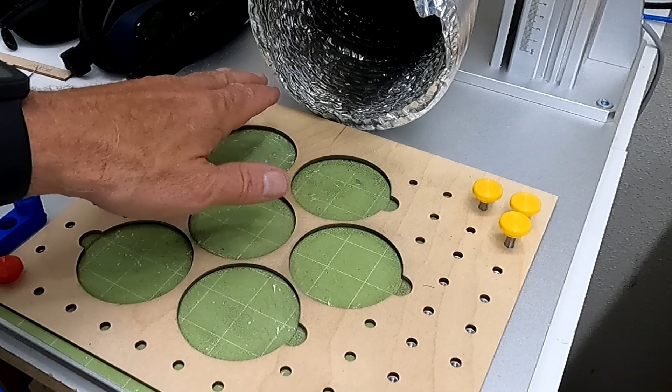This is a jig I made for these leatherette patches. In order to make this jig, I had to figure out the hole spacing of this breadboard, and it's real easy to do. So what I've done is I've screwed in some cap M6 screws here, both so I can get a measurement.

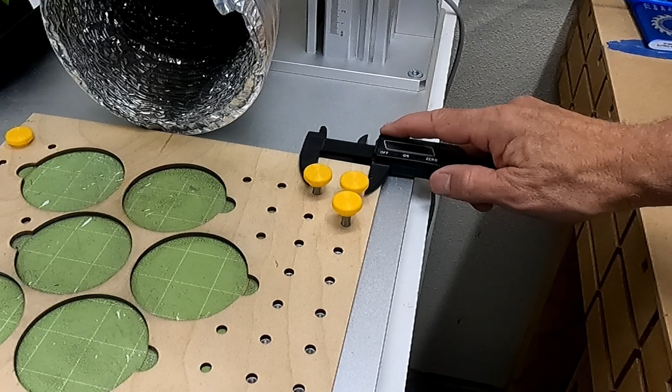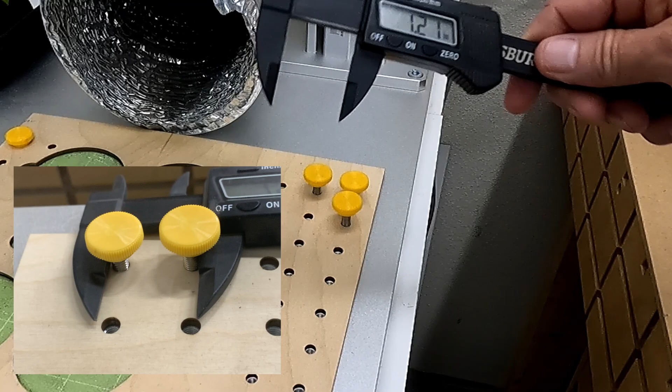I'm going to take my calipers and turn them on. I like to work in inches, so I'll zero it out. Then all I'm going to do is take the outside to outside measurement, and that is 1.21. I did that horizontally, and I want to take that same measurement vertically. They should be the same, which they are, 1.21. So we've got our spacing from outside to outside, measuring this outside to outside dimension.

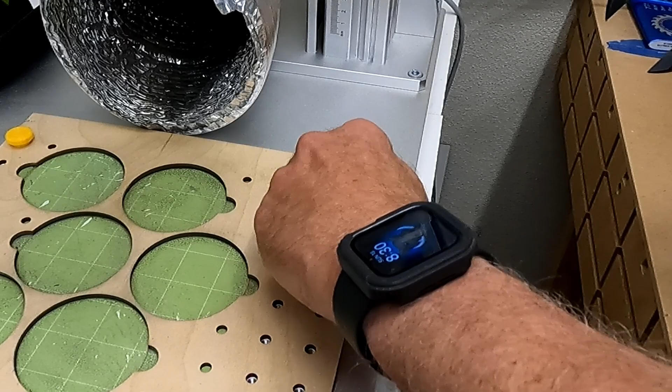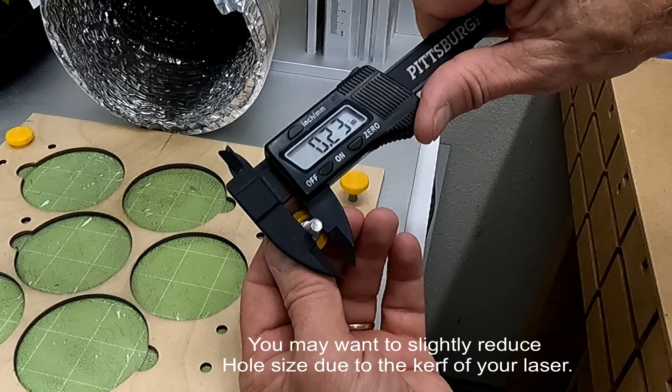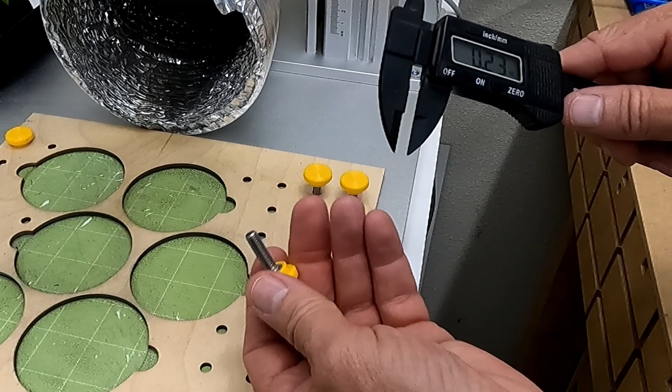Then I'll unscrew one of these and we'll get our M6 diameter, because that's what the hole size needs to be. We want them not sloppy, just a little bit snug. It looks like we need a hole size for this M6 at about 0.23. So we've got our vertical and horizontal spacing at 1.21, and our diameter for our M6 cap screw at 0.23. With those three measurements, we'll be able to go ahead and create this breadboard.

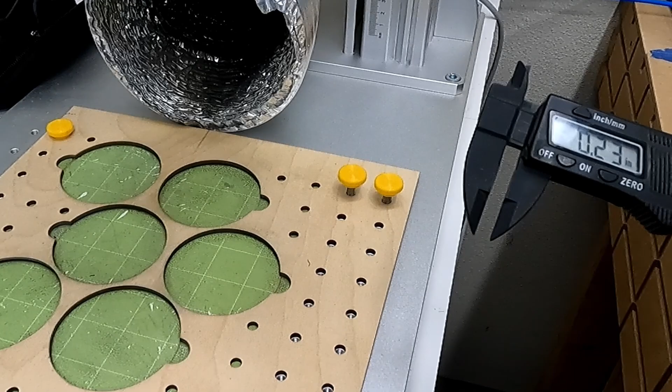Let's go ahead and jump into LightBurn, and you can see how we make this jig. To get things started, we know that the vertical and horizontal spacing from the outside edges of those M6 bolts was 1.21 inches.

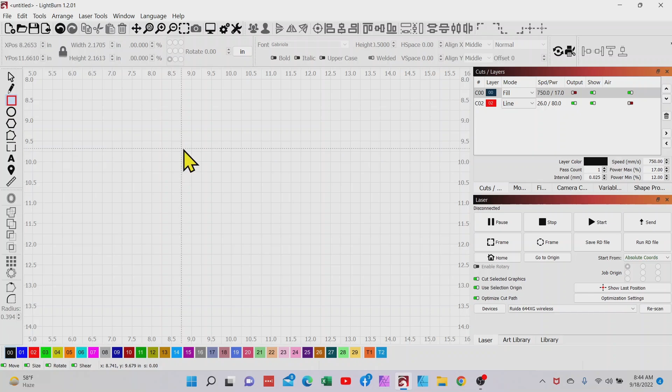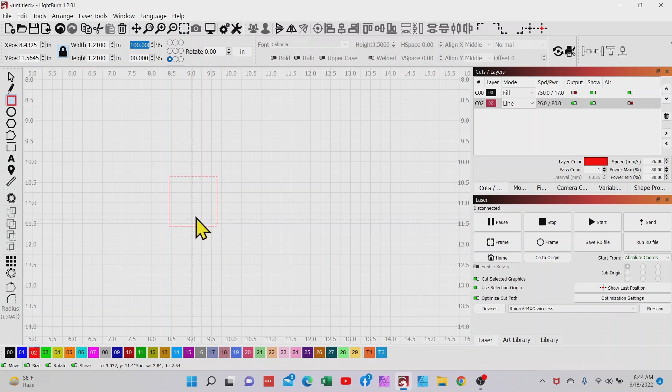So we're just going to create a quick square. I'll pull out this square and turn it red so we can see it. We'll make sure our aspect ratio, at least initially, is unlocked. We'll come up here and go 1.21, tab, 1.21, tab, and now we've got our square. We'll lock our aspect ratio. This demonstrates the outside dimension, both vertical and horizontal, of our screws, our bolts, our M6 bolts.

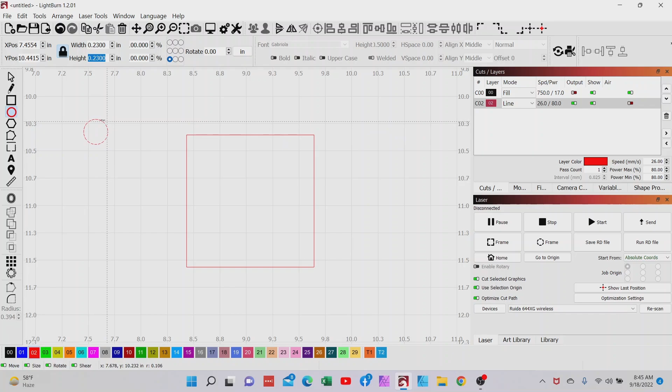So let's go ahead and make our M6 bolts. We'll go to our circle tool, hold down the shift key, and pull out a quick circle. We can see that it's a perfect circle. We'll change this to 0.23 since that's what we measured. Now this represents the diameter of each bolt.

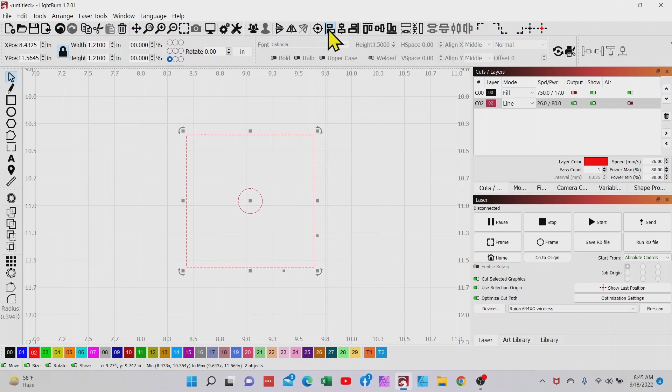We need to put this bolt circle in the corner of this square. I'm going to hold down the shift key, select my square — oops, got to go back to the select tool, my apologies — and we'll get it in there. Then we're going to left justify it and top justify it, and now I've got that bolt hole in the top part of my diagram.

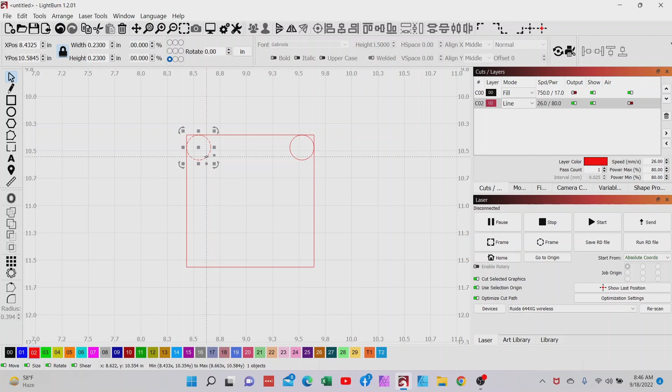I'm going to duplicate that, then hold the shift key down and select my square again, and right justify it. Now I've got two that are perfectly in those corners. I'm going to come down, hold both of these, right mouse duplicate, then hold down and select the square, and put them at the bottom.

And so now I've got my round circles that represent my M6 bolts. And what this square did was make sure that my vertical and horizontal spacings were correct.

Now the next thing I need to do is get the center line spacing from the center of this bolt to the center of this bolt. I need that spacing for our array tool - it's a value I've got to key in.

So the way we're going to do that is I'll turn on my pencil tool and draw a line from the center of this one - you can see it turns into a little bullseye. Then I'll right mouse click to turn that off. I'll do another one here and here, just to check my vertical and horizontal line spacing, and when doing this you always want to make sure snap to objects is on.

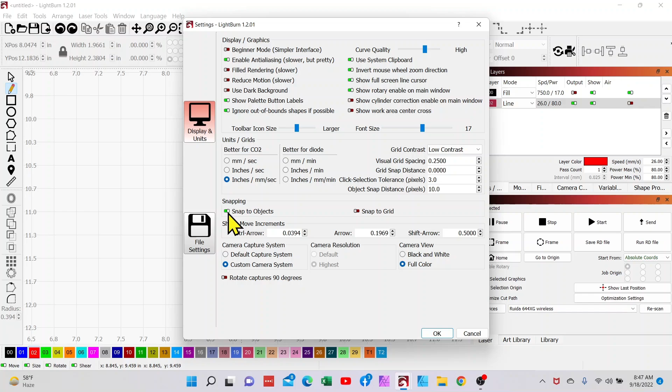I leave that on pretty much all the time. Now we can go to the ruler tool right over here and highlight this segment, and you can see it's 0.98. If you look at this area, segment lengths, when I hover over it, it's 0.98 and it's 0.98 here, so we know it's pretty much a square.

The pattern on this breadboard is square. But we need to remember that 0.98 because we're going to need that number once we get into the array tool. So I've got my basic layout done right now.

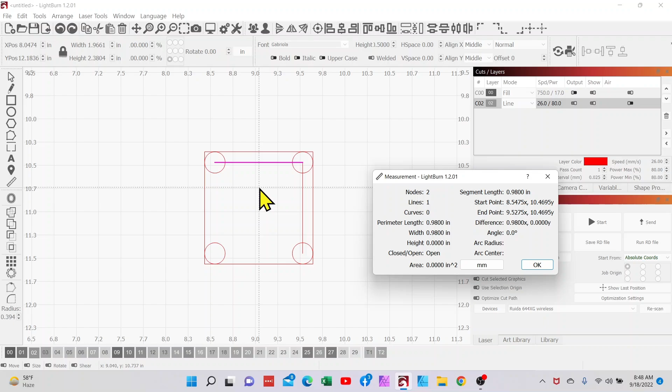But before I get too carried away and create the whole breadboard, what I'm going to do is come up here, get that shut off, hold the shift key down and turn all my little helpers here to black, or you could turn them into a tool layer - really doesn't matter.

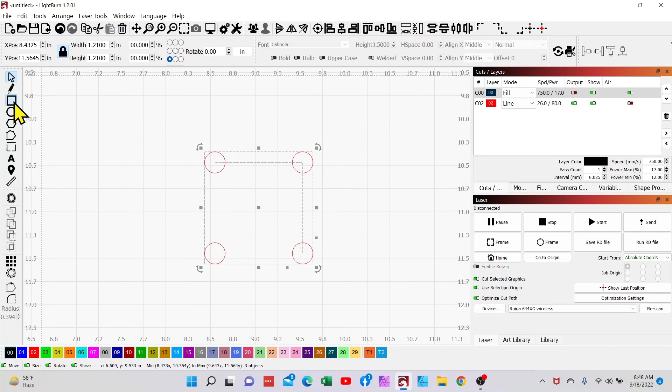And then I would come and just make another rectangle here, turn it red, and cut this little section out on my CO2 laser, just to make sure I can screw these into the breadboard and they fit snug but not too snug, and that the spacing is correct.

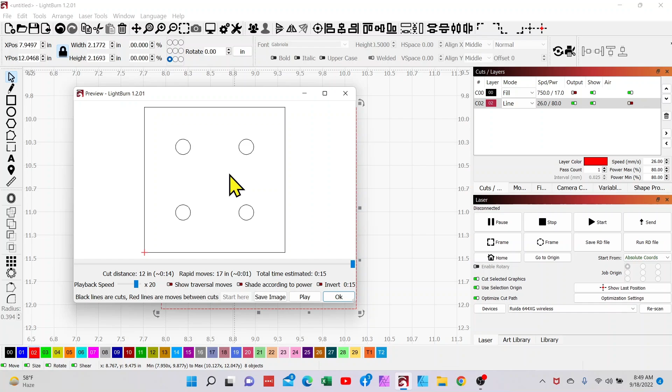And if you need to make any adjustments, you can do it with this small section instead of wasting a bunch of wood. So once I cut this out and verify that my hole spacing is right, then I can go ahead and make my entire breadboard.

So let's assume that you've done that, you've cut that out, and it's time to make the full-size breadboard. Now that we've got our diameter spacing, we've got our spacing between the two centers, and I think we can go ahead and lay out the main part of this breadboard.

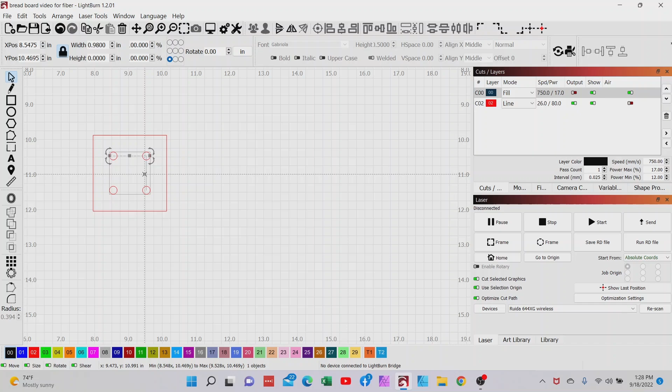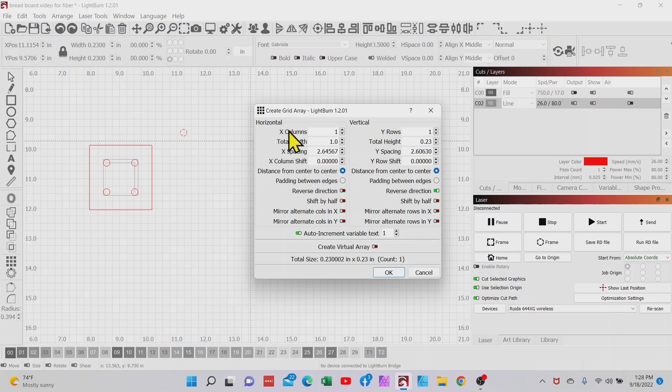So the first thing we're going to do is come over here and duplicate one of these and drag it over here, back it up a little bit. And so what we're going to do is come over here to the array tool, the rectangular array tool. I'm going to click that, and move it over here so we can see.

So the first thing we want to make sure is selected is this radio button right here, distance from center to center. So when we offset all of these X and Y rows, we want to make sure it's measuring from the center. And if I go ahead and go with a spacing of

0.98 in the X and 0.98 in the Y, then we should probably be able to go ahead and get our spacing done.

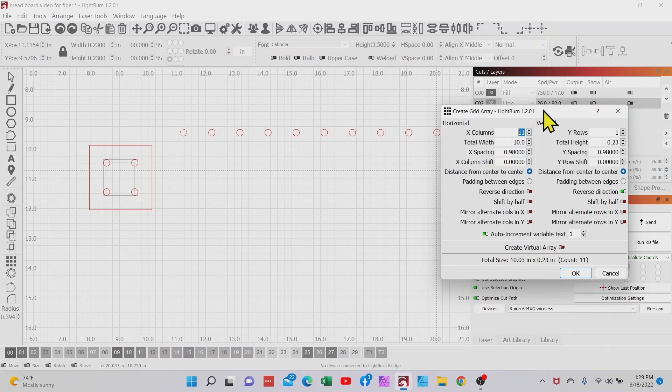So our breadboard is 12 across and 9 down. So we're going to do 12 X columns and 9 Y rows. There we go. We're going to say OK.

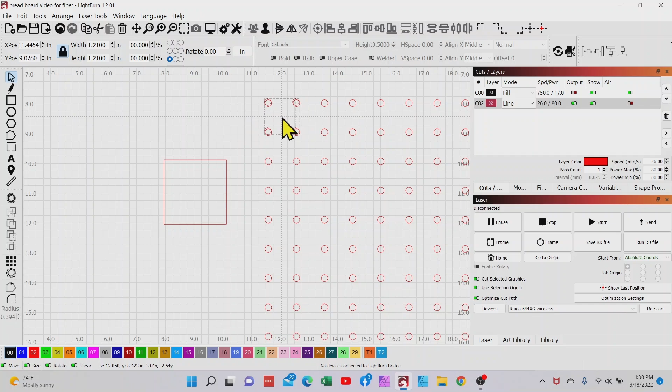And then at this point we can group all these and go ahead and put a perimeter around it. The other thing I like to do is grab a hold of these, make sure they're all grouped, and then grab this, and this should overlay that, just to make sure we've got our spacing right.

And you can see it all lines up perfectly. So I think we're on the right track that way. I'm going to just undo that.

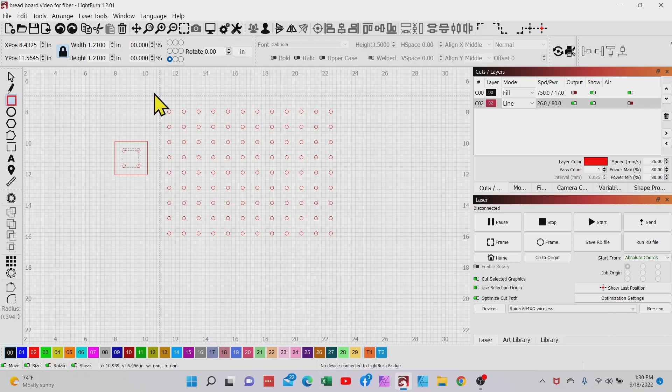And at this point, what I would do is come along, and we've already got these holes grouped. I would make my outside perimeter, turn it red because it's going to be a cut. I would go ahead and select my holes, hold the shift key down, select my outside perimeter and center it up. And at this point I would probably cut this out

and then test it on my breadboard. And if needed, you can always adjust the size of the perimeter so it fits on there properly. And then it's just a matter of putting this on the breadboard and drawing a rectangle when you're in the

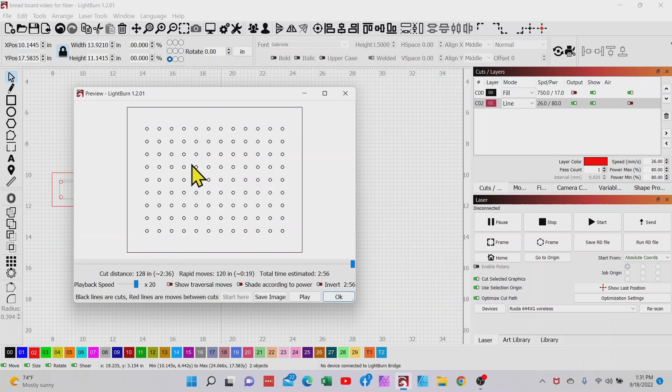fiber laser side, and have it superimpose your maximum cutting area for the lens that you have. And then you just have to make sure that your cutouts are going to be within that particular area. And so I'll show you what I did for my leatherette patches.

So I've switched over to my fiber device, my 60-watt JPT with the 210 millimeter lens. I've got roughly a little over 8 inches by 8 inches, and that's the biggest lens I have. I'm planning on getting a bigger lens, but this is as good as it gets.

With this 2 3/4 inch patch, I'm only going to be able to get 6 patches done in one fell swoop. So before I lay out my layout on the breadboard I just created, I made a rectangle that's pretty much the full size of the maximum working area of that particular lens, and I'm going to superimpose that on the breadboard when it's screwed down to the laser base, and pay attention to where that falls. Based on where that falls, we'll determine where we need to place these.

So the next thing I'm going to do is get this fired up and show you that this is superimposed on the breadboard, and we'll pay attention to where it sits.

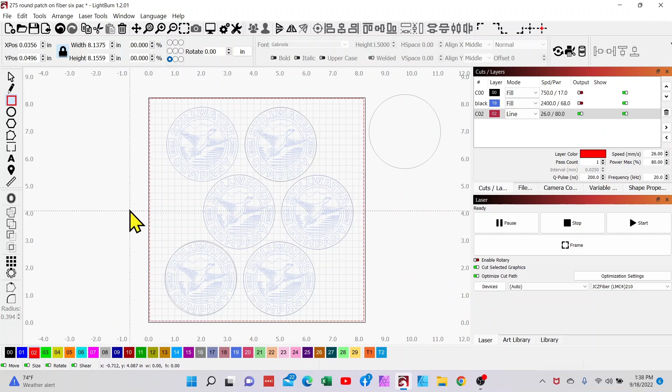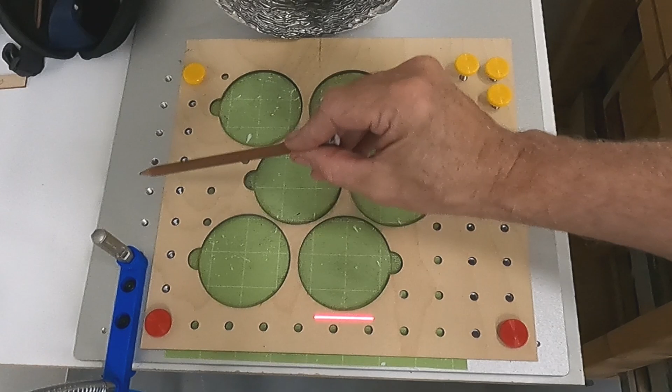Okay, so what I've done is fired up the 8.1 by 8.1 maximum work area with this particular lens, a 210 millimeter lens. I didn't create the breadboard all the way over here because I've got an air assist bracket taking up part of that. So you can see my work area, based on how my lens and work arm is mounted, is basically just inside this second row, which would be the first row in our breadboard, and one row up from the bottom. So 2 rows over and 1 row up is where my working area is going to be.

And I know that I've got to keep my 6 leatherette templates in there. The other reason is you'll notice that I created a place to dig these out.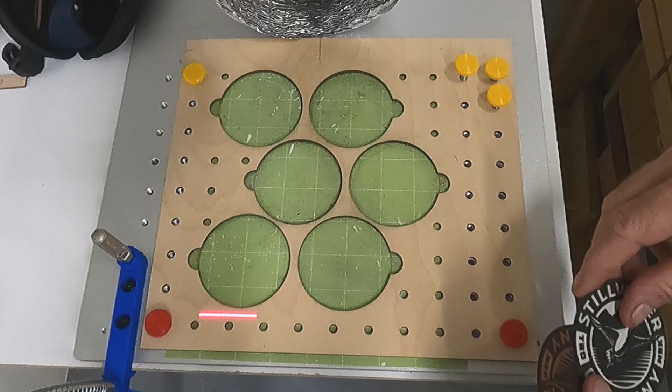Here, let me get a couple and I'll show you. The reason why I put these little scallops in here is when you have these in there and they're all engraved, I don't want to have to be digging at them. I can just take my finger and they come right out. So when you're making things like this, generate these little scallops. They make it a lot faster and you're not digging.

And then it's just a matter of placing whatever template you need. The beautiful thing about that is you make this template, and then you can adjust your layout accordingly. So what I'm going to do is turn off the perimeter and turn on the individual circles, and you'll see what I mean.

So I'm going to keep this running, and we're going to just stop that. I'm going to turn this on. Now you can see, might be a little hard in the video, but it's outlining each one of these circles, and I know that this jig is exactly lined up.

If they were off, what I would do is individually select one, move it, dial it in. The good thing about working on a fiber laser—let's say this top left-hand one wasn't quite right—I could come up here, ungroup this, select just that one, and start it. You'll notice it was just getting this one taken care of, and I could move it in the software.

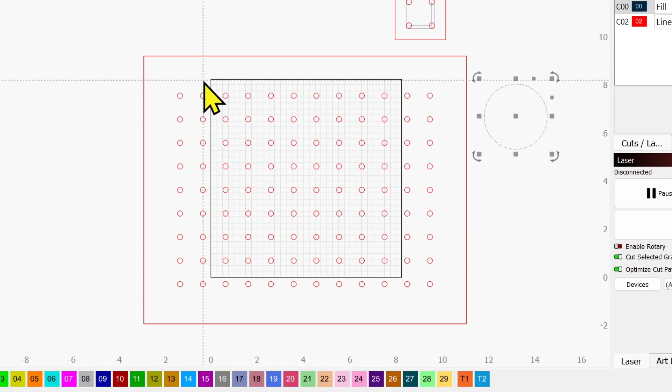Okay, back to our layout. So we had our breadboard layout. When we superimposed the maximum work area on the breadboard, we noticed the left-hand side was between the second and third row, and one row up from the bottom. So when we laid that breadboard down, we knew this was pretty much what we were looking at.

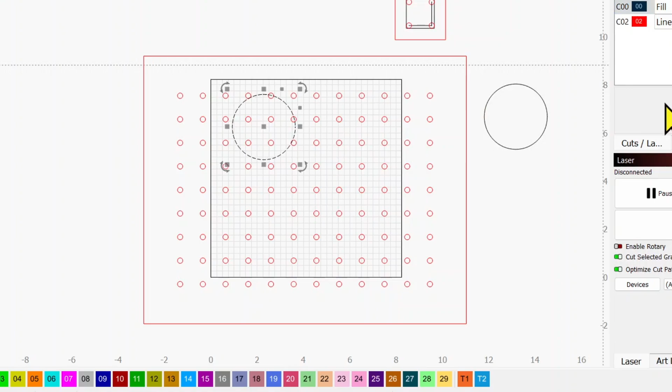So what that means is when you're ready to place these 6 circles we need for our leatherette, they have to stay within this hatched border, or it's going to be outside the work area. Then what I would normally do is duplicate these and start placing them. Let's turn this on so you can see that. We know we can't get 3 across, we can only get 2 across. So I'm going to do a quick and dirty layout here—we know we've got to scrunch them up.

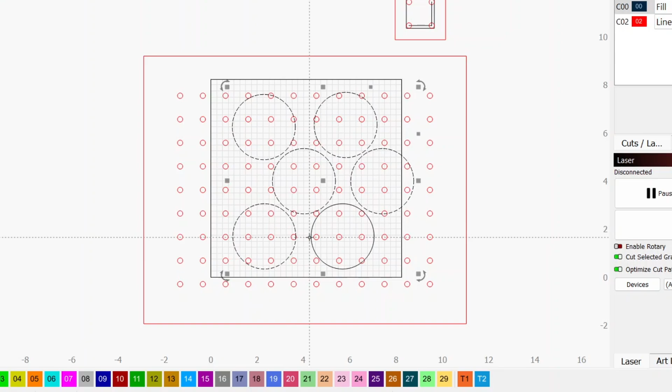Then we'll take these other 2 and duplicate and offset them this way so they all fit. And then what I would normally do is I would just group all of these blacks, all of these black rings. Go ahead and group them.

And then I would position them accordingly, kind of in the middle of where they all need to be within this hatched area. At this point then what I would do is I would go in and remove all the circles that are within those.

So you would just systematically go in and delete those, put your little scallops in, and turn these red, and then boom, you've got yourself a cutout where you would go ahead and cut it out, screw it to your breadboard, and these 6 circles would be within your work area of the lens that you've got installed. That's really all there is to it.

So you could make this for just about any kind of product that you make where you're making a lot of them, and so you want to just place them in the jig, hit your foot pedal, and away you go. We can go ahead, if we wanted to, we could start erasing these.

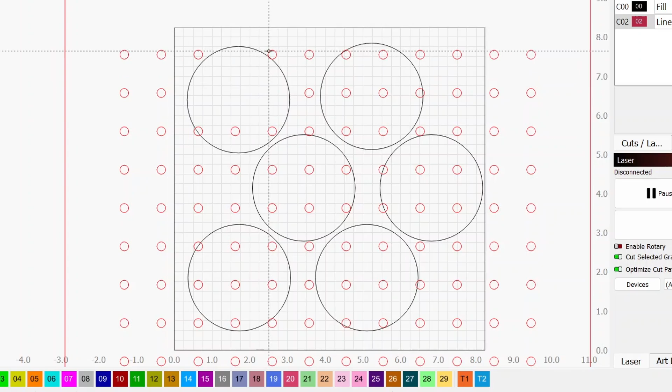Got to ungroup it, sorry. Come in here and we'll just quickly do this. That one's too close. These need to go, these need to go, these need to go. That one's too close. Just getting rid of the ones that I know are going to be a problem for us.

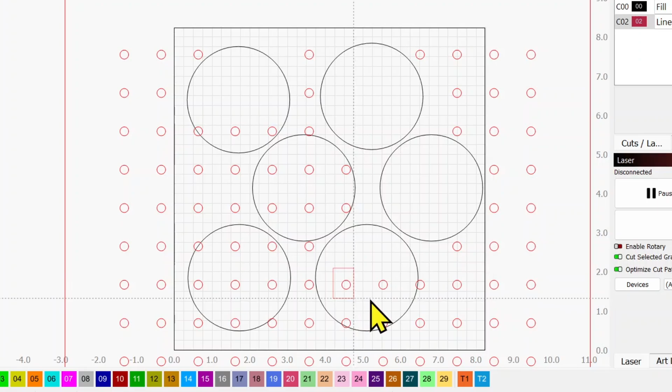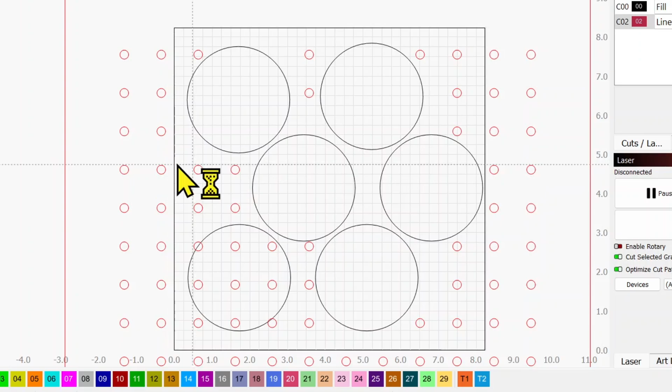Got to use Control-Z to back up sometimes. These ought to go, I got to go. This one's got to go. These 3. These 4. And looks like that's going to be about it.

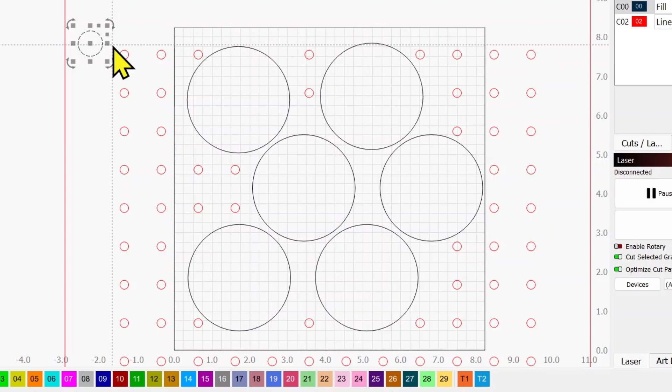Okay, if I wanted to go ahead and put in those scallops, I could hold down the Shift key, make it at least a half inch or better. Right now we'll just make it black for fun. If we have our snaps on, so if I have my snap to objects, what I'm going to do is grab this by the center, and you'll notice it'll snap to the edge, and that's what we want.

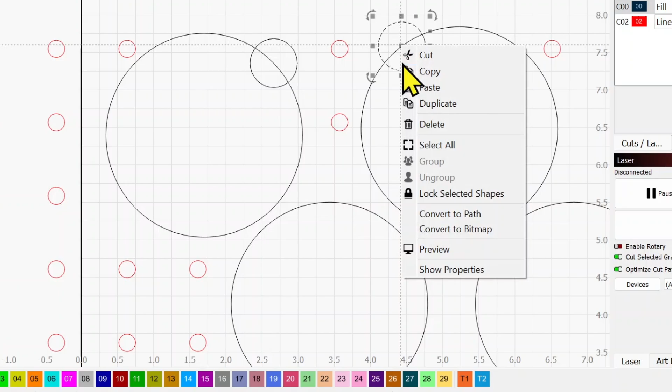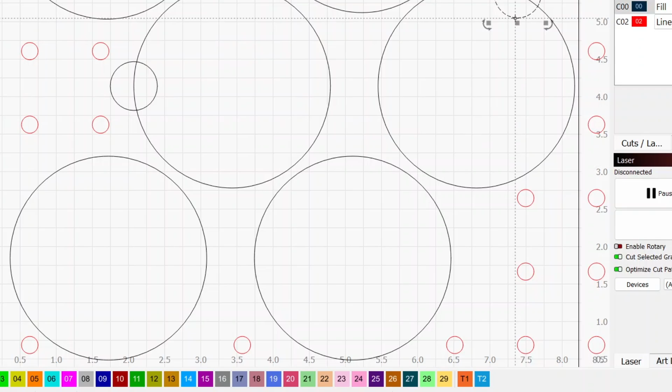So we're going to just duplicate that and move this around to wherever it makes sense for us. One there, maybe one here. I'm going to say one here. We're going to get rid of this one. 2 more, and we've just about got this jig done. One more here, we're going to do that right here. That'll snap there. Duplicate it one more time, and we can do it right up here.

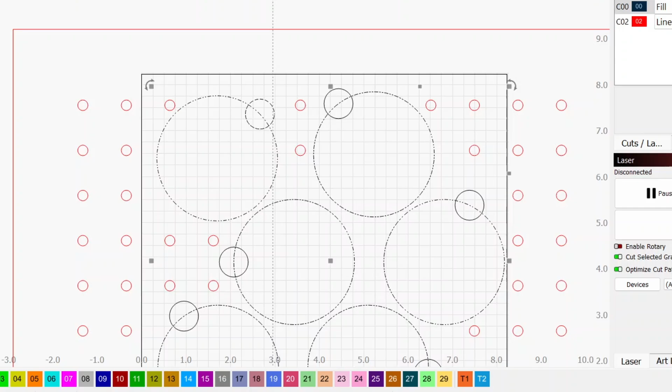Now to join these, you can just go ahead and get those selected. We're going to ungroup them because we want to do this one at a time. Group those 2 and weld it. Group these 2, weld it. These 2, we're just welding here, guys, nothing special. And at this point, that's all done.

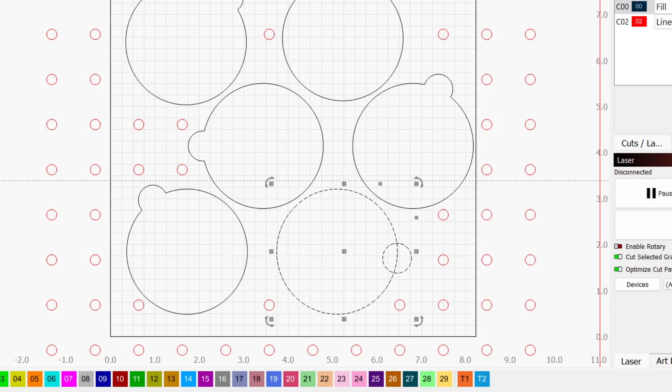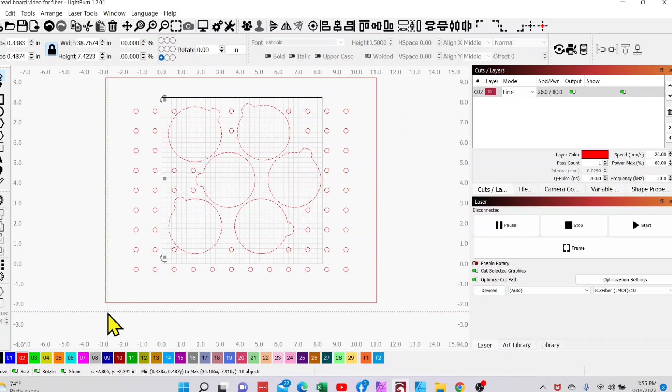So then what we would do is I'm just going to get rid of this, I don't need this anymore. I want to select everything black, so I'm going to come up here to my layer. I'm going to hold the Shift key down and select the black layer. That's going to select everything black in my template. I'm going to turn it red because it needs to be in my cut layer. Then what I'm going to do is group them all.

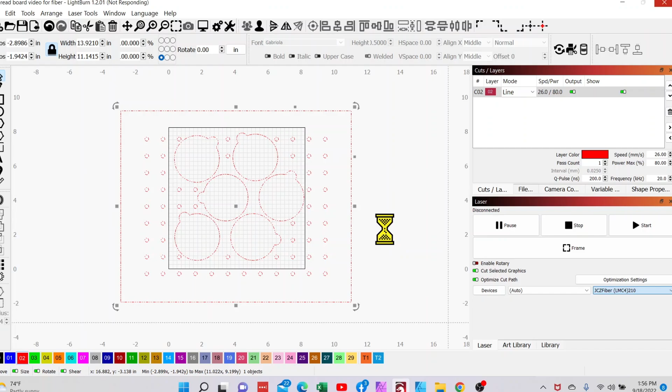And at this point, if I switch to my CO2, my Thunder 35, 100 watt, now I can take this right here and cut this template out, and I will have a template so I can go ahead and systematically cut out 6 leatherette patches at a time.

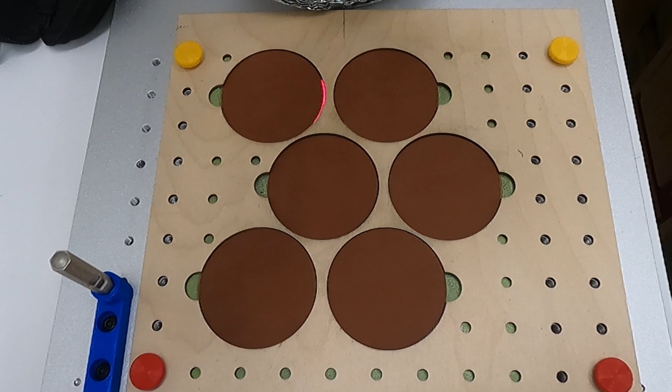Okay, this is the fruits of our labor. We've got this jig cut out. I've got 6 leatherette patches cut out from a sheet of leatherette. You notice there's no stitching, and it's because these are 2 3/4 inches in diameter, which they don't commercially make.

So we're going to pull the trigger on this, and you can see how it engraves. Going to get a little bit noisy. I'm going to turn on the air assist. And let's get them knocked out.

Turn this off. We've got, like, the edges are all nice and done. We'll get them wiped off. Jig worked real good. I also put a Cricut sticky mat underneath here to hold these leatherette patches down. That also works really well.